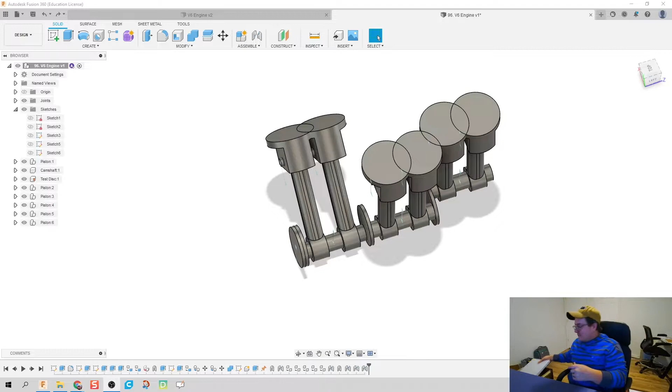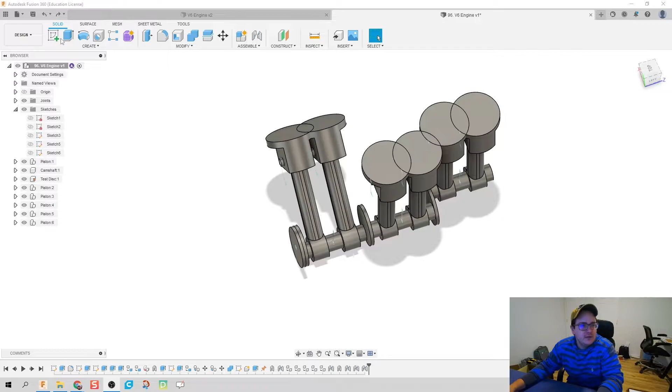What we're gonna do today is make our block for our engine, but we're gonna make it on the fly. This is an engine model to show how a camshaft works with the pistons, so there are gonna be some changes that aren't quite true, but it's a model, not the actual thing. First thing I'm gonna do is delete this test disc. I don't need it, everything else with it works perfectly fine. We know all of our joints look good, so instead I'm going to create our engine block and then joint the camshaft to that engine block.

So how are we gonna do that? I'm gonna hit P for project, and make sure that projection link is not selected. You might run into a little bit of issues if it is, because since that's a moving part, I don't know if it's going to affect it, but I imagine it would.

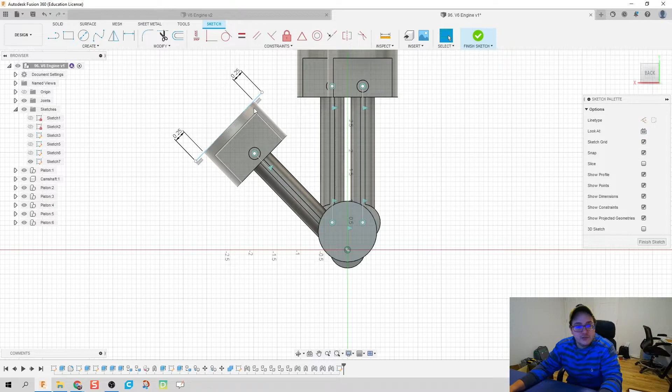I'm going to go an extra quarter inch off both sides of that, that way you got some room for our headers to stick on. And then I'm just going to kind of eyeball some geometry that would look something like the rest of the body of the engine.

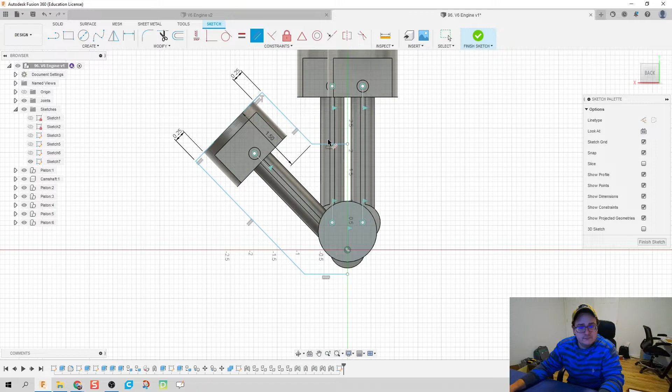Let's go ahead and do some parallel constraints, that way everything looks kind of all right. I'm going to do a line right down the center, right click and make it a construction line.

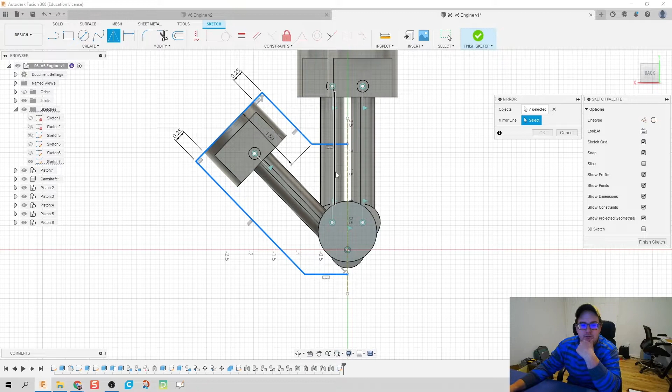Let's see if I can select all the geometry and mirror around that center line. Is it going to work? No, something's not working. Well, let's try that again. I'm going to select this geometry around that center axis. There we go. Something was funky going on there, and it didn't like me.

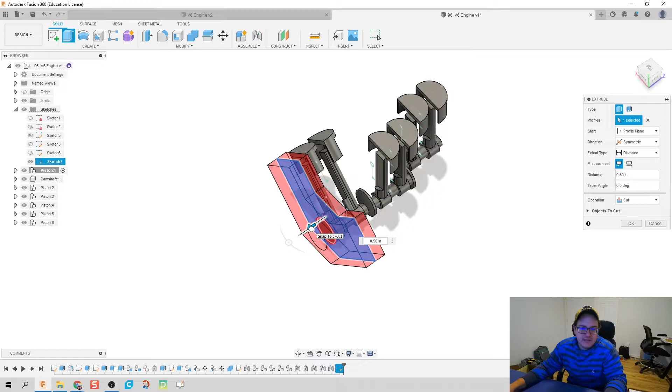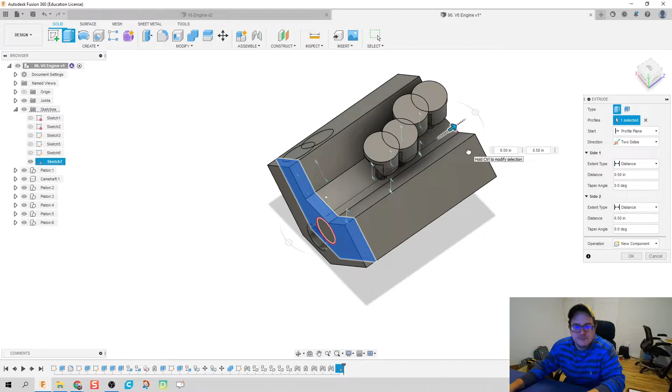All right, everything looks good for the most part, except when it comes to this part right here. So I know we're not going to do symmetric, we're going to do two-sided, and instead of cuts, new component. We want to give enough room for our engine block to have the pistons housed in it, but not look cramped, so I'm just going to kind of eyeball this dimension. Now this first piston, that looks like a good healthy distance. This last one, I'm going to go a little bit further, and that looks okay. I don't like it, it looks a little too far actually, so let's do 6.75. All right, looking okay.

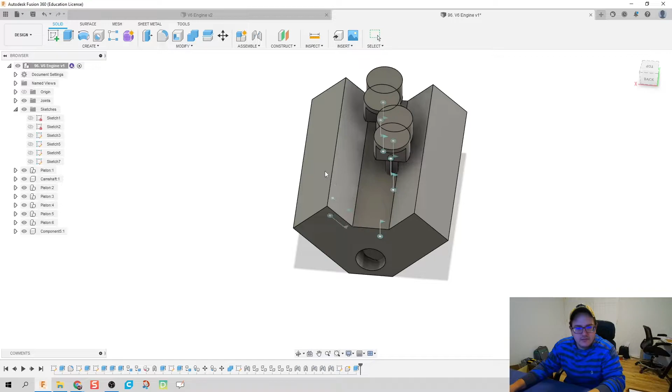Now I'm out of curiosity, I wonder if... let's do Shift J for build as built joint. Let's do the engine block with the camshaft, revolute around that. Didn't ground my engine block yet, which is okay, let's do that now. Let's right click, let's hit ground, and let's go ahead and rename it. We'll call it engine body.

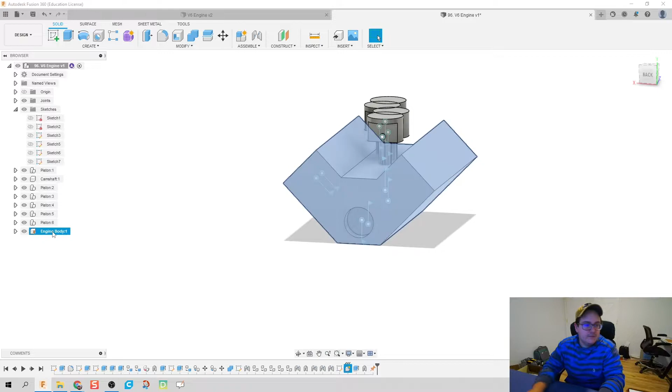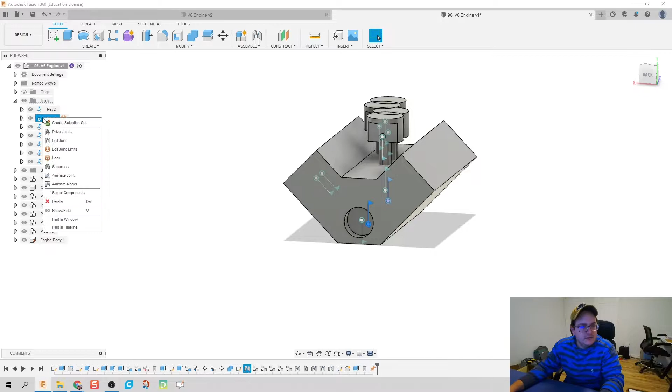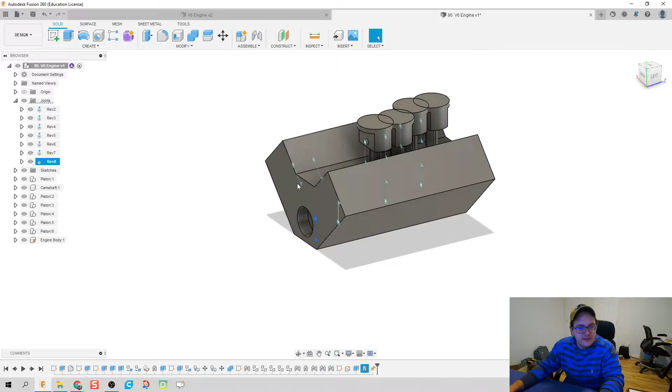Now out of curiosity, I wonder if I did a boo-boo. Let's go back to our joints and I'm going to check these out. Animate joint, that looks okay. Animate joint, that looks okay. Something in my gut tells me something's off. That looks okay. You know what, I think our second piston is not joined correctly. Let's take that out. Oh, there it is, it does, it is. We're good, okay. Something in my radar was going off, but I didn't like it.

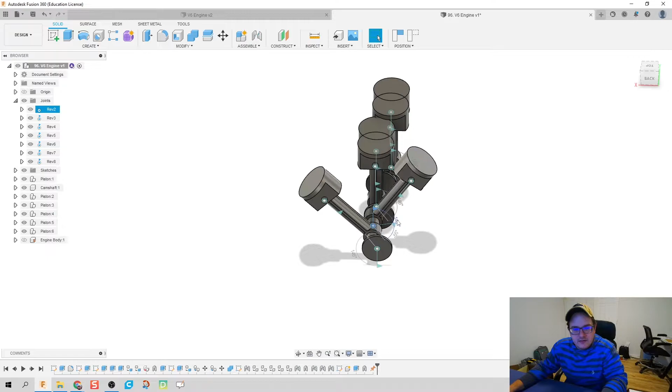Okay, so I'm going to move this second piston to -120. Is that going to be it? No, I got the wrong piston. -120, is that going to work? No. All right, I tried something new, don't worry about it, forget it, we're moving on, okay.

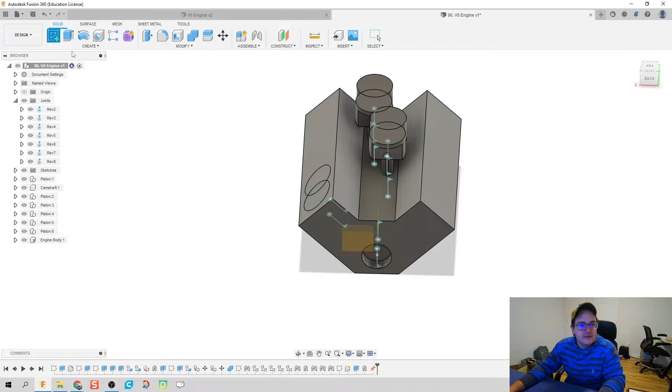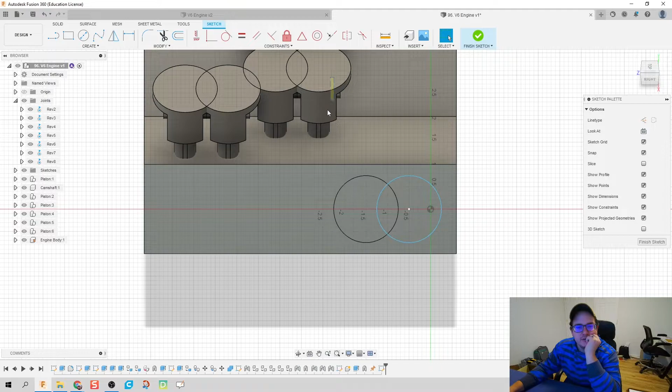So let's create a sketch, this plane right here, and let's hit P for project. We want to project that circle onto our engine block. Now this should be a linear relationship, so let's see if we can do that. Rectangular pattern this circle going down this distance. I wonder if I could be so lucky to be able to eyeball this alignment right here. Now does that alignment check out?

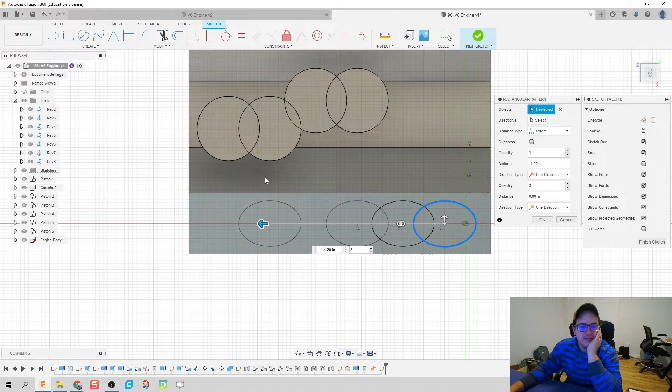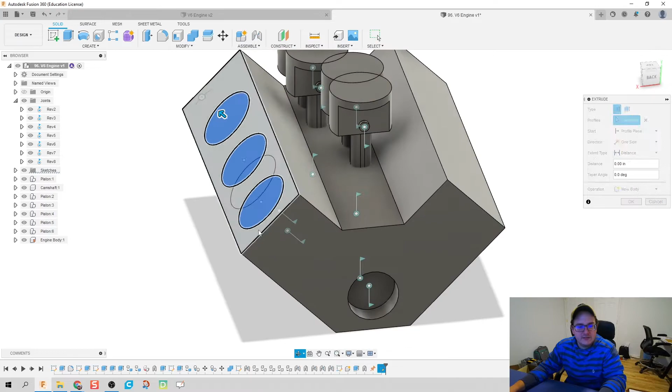You know what? It sure does. So here's what we're gonna do. We're gonna go back to the sketch, hit finish sketch, and extrude these three profiles all the way through. And we're gonna make our other parts inactive, so this only cuts through the engine block.

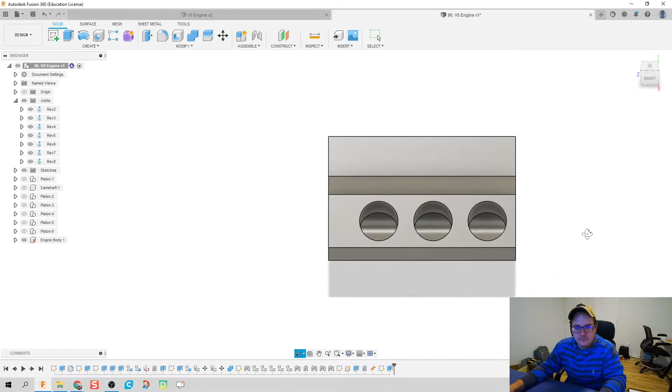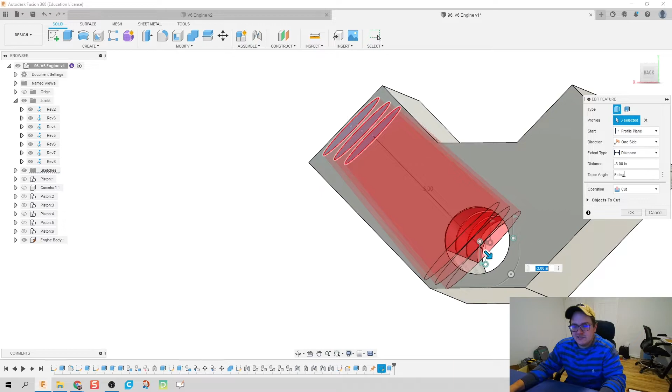Looks okay. All right, make sure we didn't cut through any other parts of the body. Now, I did have to do a little bit of a change there. Let's do a draft, a 5-degree taper angle, because... actually, let's just keep it 0 for now. We are going to have to make some edits because there will be some interference between the pistons and the engine block, but let's get our holes cut first and worry about that later.

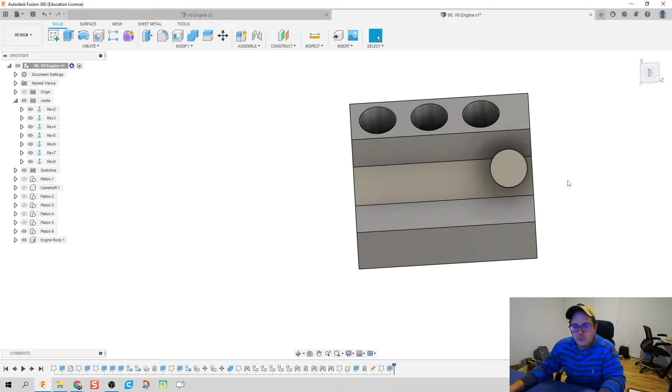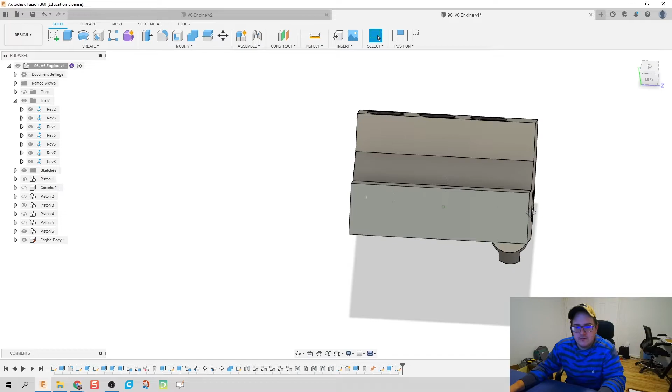All right, now on to the last one. Let's bring piston 6 in. Now I'm curious, what is the distance between the end of this piston and the end of the block? So what I'm going to do is move this piston down. Oh, come on. Let's move it to where it should be sliding through. Let's capture that position. Let's delete that sketch, because that sketch ain't going to help us at all.

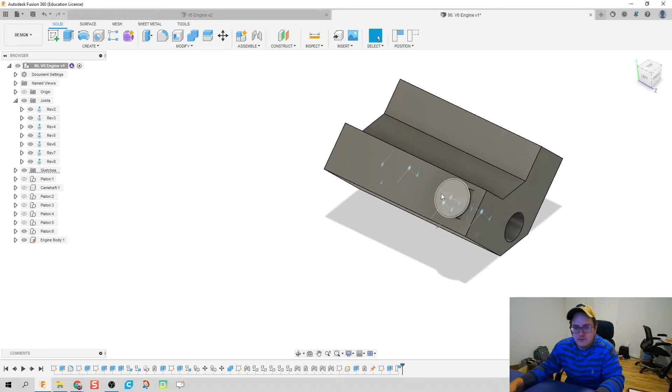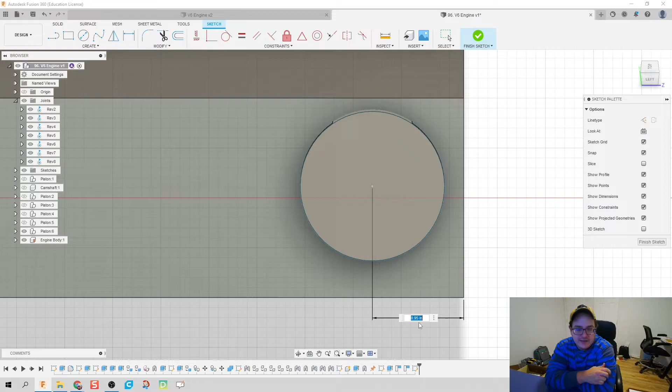Let's create a sketch on this plane now. Capture position. Let's do P for project. Click OK. And then what is the distance between the center of that piston and the sidewall? 0.95. So that tells me one piece of information - I need to leave that circle, create a true circle, make this 1.5 inches, and then make that 0.95 inches from the side.

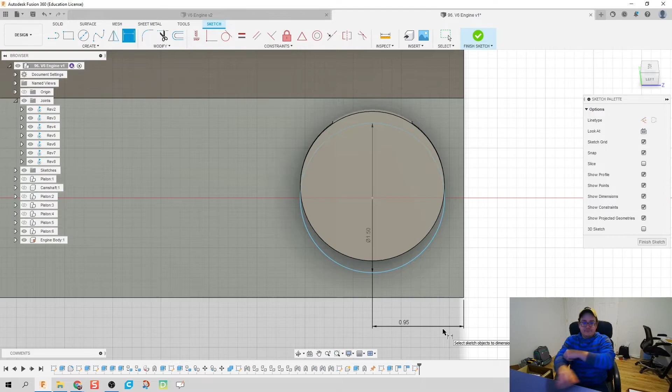We should be good. Zoom out a little bit. Let's do a rectangular pattern, this geometry, this direction, 4.2. Let's bring pistons 3 and 5, 2 and 4 in. And those look like they line up okay. We're going to click Finish Sketch.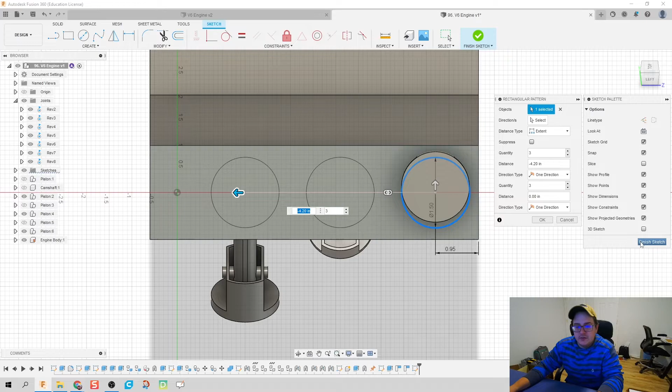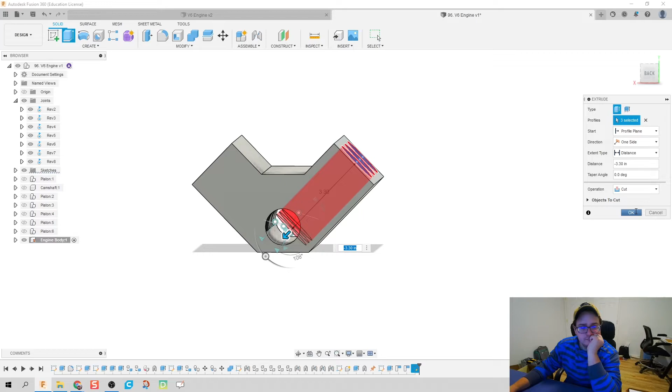And then make our pistons inactive again. And cut the body of those pistons out. If everything looks good, hit cut. There we go. Let's bring our pistons back in, and let's do a couple of joints, and then we'll call it done for this video. We didn't quite get everything in there, but we got pretty daggone close.

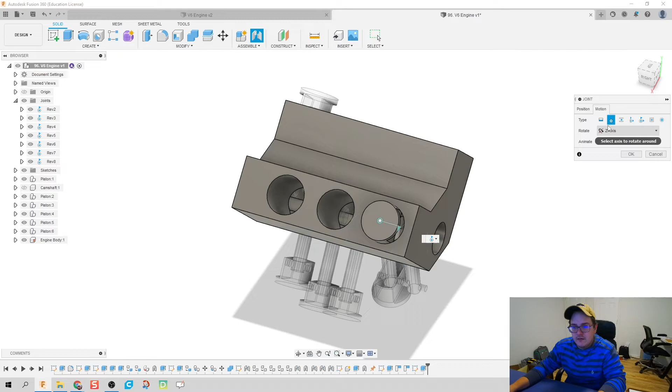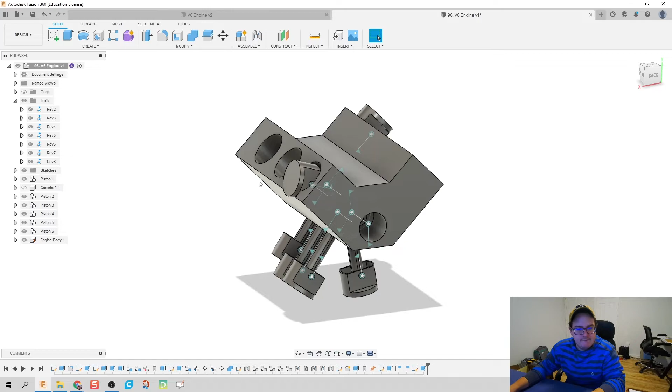So the face of the first piston is going to slide through the face of that. Looks okay. Now remember, this is just a preview, so it should go ahead and attach. Let's try this out again. That's not quite what I want. Let's try this out again.

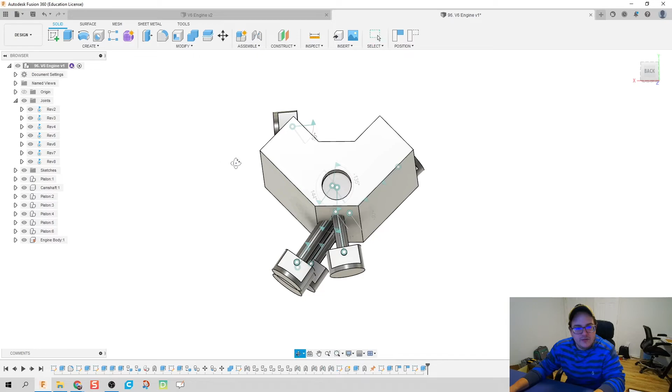Let's bring our cam back in. Camshaft, looking okay. Let's do a joint between... you know what, let's go ahead and move these into position. And I'm willing to bet something about my working planes wasn't quite what I needed.

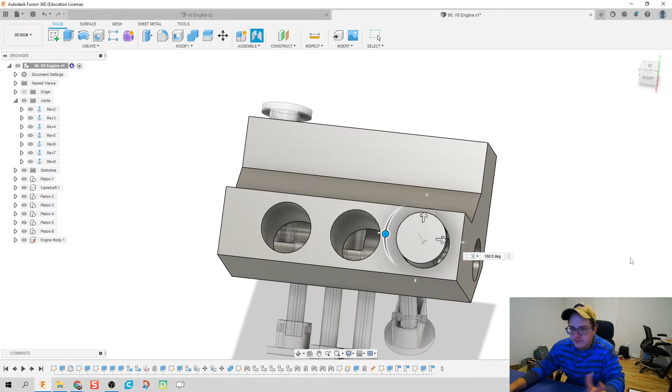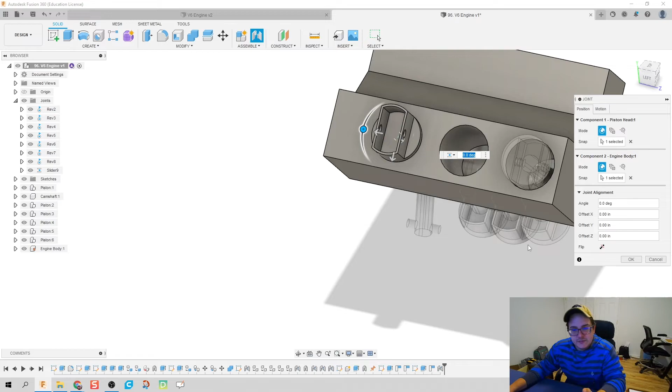Capture that position, J for joint. Face of that, through the face of that. That looks okay. Now the question is, why didn't you work earlier? I don't know, I have a feeling it had to do with working planes. So what I'm going to do is J for joint, and make sure I click on the front face of this with the front face. And I think, see how that's upside down? That tells me when I flip this, it is going to be oriented at 180 from where it should be. And that's how we fix that issue.

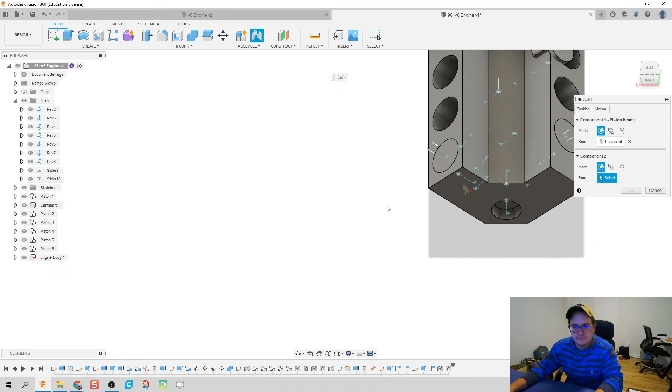Phew, man, that was a tricky thing. All right, J for joint. Which one have I got? Next one in line. It's gonna be here. I'm gonna flip it, go 180. Click OK. And we're almost done, folks.

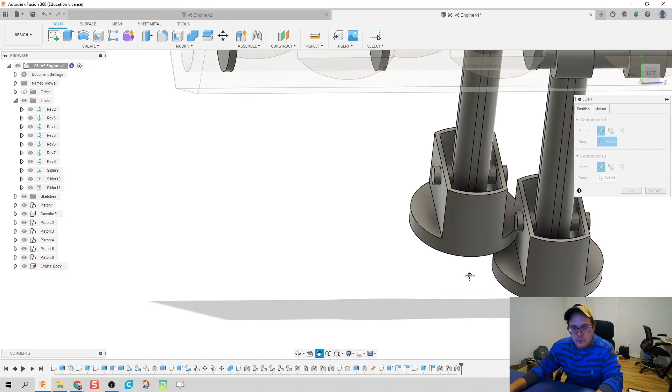Hopefully we can make some edits to this, maybe post video, so I can be able to 3D print these things, but we will see. Gotta flip it, 180 it, click OK.

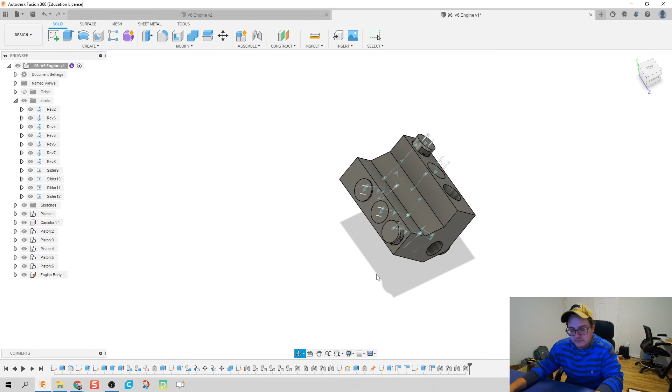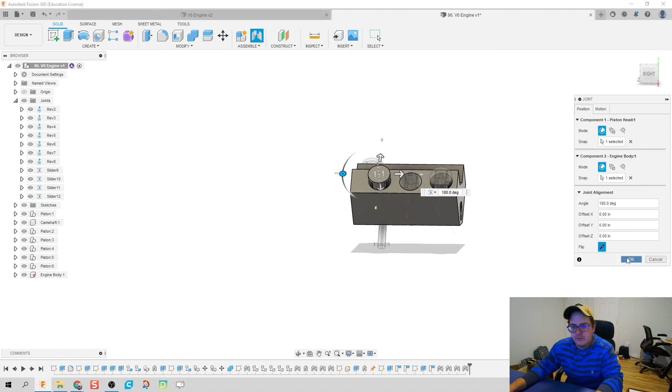Two more, J for joint. I lost where I'm at. Okay, J for joint, there we go. That face with that face. Man, all of them are upside down. They really didn't like to work with me today. Last one, but surely not least. Of course, that one works though. Looks all right. Now, fingers crossed.

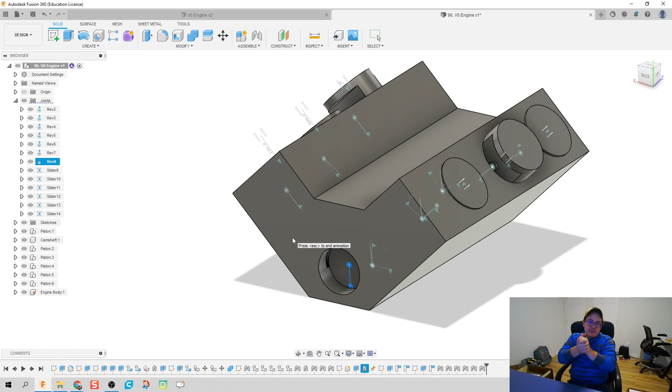And we have a working V6 engine. Looks great, guys. We're gonna get done with this video, wrap up with one more. We're gonna throw our headers on there and maybe have to make some edits so everything works a little bit expected. Maybe even throw a gear on there.